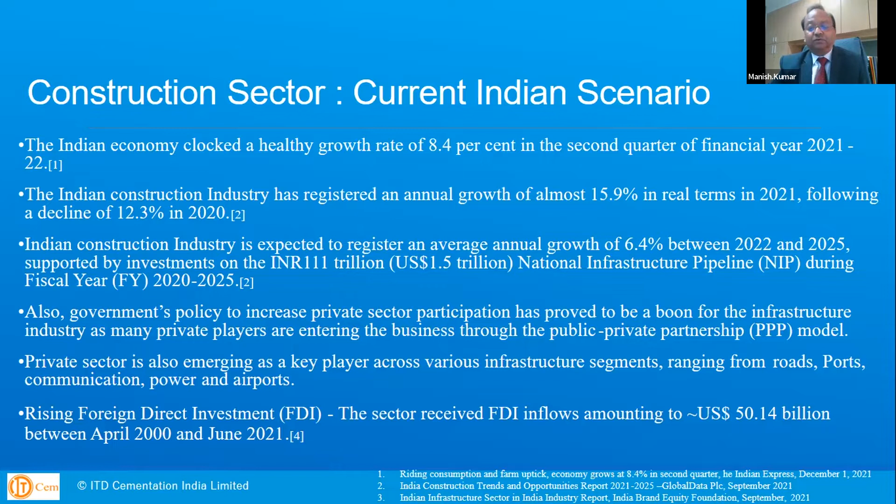Now, along with the very exciting times that we are all living in as far as the civil engineering fraternity is concerned, there are certain challenges. Let's look at that quickly.

If we talk about the financial challenges, then the cost of capital is very high, both in terms of the project cost and also the capital cost on the plant and equipment that one needs to purchase to execute these projects. So we are that kind of industry which is capital intensive.

And there are delayed returns on investment. Typically, the gestation period is very large on infrastructural projects, with a long-term payback period. Access to financing is very limited. Not everybody is able to get the financing done, especially the smaller contractors.

Low capacity of private players. Adverse cash flows on projects - many times we see that because of that, the contractor or the project faces challenges. So these are some of the typical financial challenges that one has to face working in India.

As far as the execution of projects is concerned, I believe that technology adoption can be done to expedite things, to improve the situation, but we are currently very slow at it. So this is a challenge that we all have to face and try to improve.

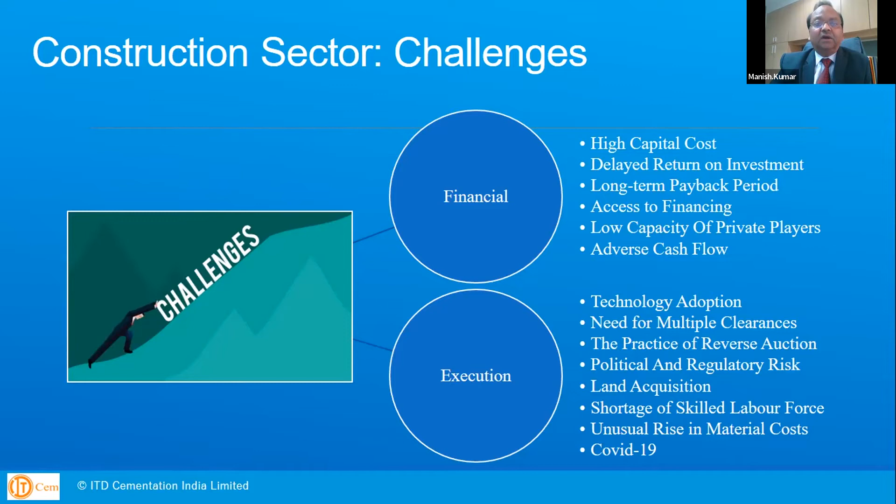Talking about challenges, there are also plenty of opportunities. Construction sector is critical for revival of the economy, and the government understands this. As it employs almost 49 million people, I'm sure the government focus is going to stay on this. Almost 12% of the nation's working population is employed by this sector.

India is expected to become the third largest construction market globally in 2022. Construction in all sectors contributes to about 60% of the total investment that takes place in India.

And we all know about the National Infrastructure Pipeline, which they had announced some time back, covering 6,500 infra projects totaling about 105 trillion rupees, which subsequently was enhanced to 7,400 projects.

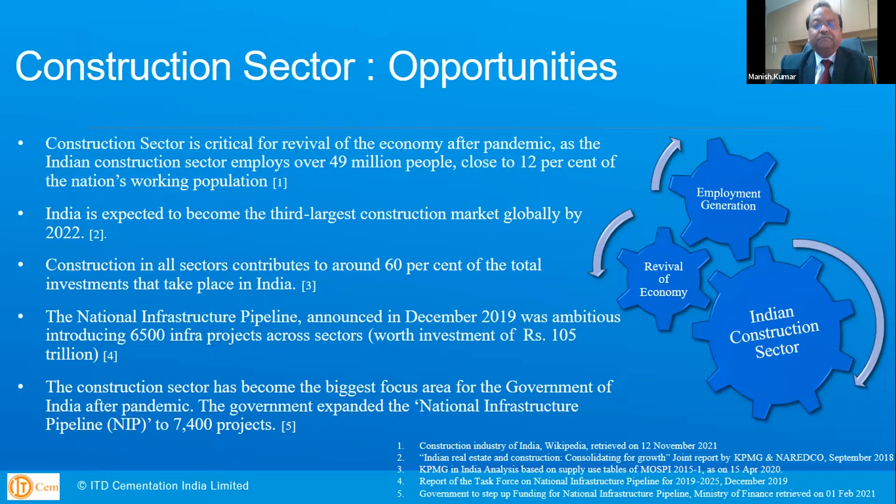Now, why new technologies? Since I'm going to talk about some of the emerging trends and new technologies, why are we talking about it? Why it is relevant is because of these reasons.

The project sizes have increased. Very large capital intensive infrastructure projects demand efficiency in terms of time and cost. There's a lot of money at stake, and time and cost are very important to make it viable.

Accelerated construction periods are demanded. We can't be selective now. Earlier, we used to select our sites based on the geology which is suitable, but now we don't have that choice.

So most challenging, geologically demanding sites, also we have to do the construction and find a solution. Overlapping of design and construction phases requires flexibility. Many times the design is still going on while the construction has started, and that requires flexibility in terms of construction methodologies.

Design optimization is done very efficiently. Very efficient designs are being used, which means there's less margin of error. Hence, whatever technology the contractor is using in the field, that has to be just right every single time, first time and every single time. There's no margin of error.

Deep excavations in the heart of mega cities, as we are building metros and underground metros, we are all facing this situation - 25-meter plus excavations right in the heart of the city through the center of the road. And we have to find the right solution to do that. Oftentimes, adopting new technologies gives a better solution to overcome these challenges. I strongly believe that in terms of quality, durability, safety, and cost, they are a better option many a times, and therefore we should be open to adopt them. The benefit in terms of saving construction time would facilitate completing more projects for the country.

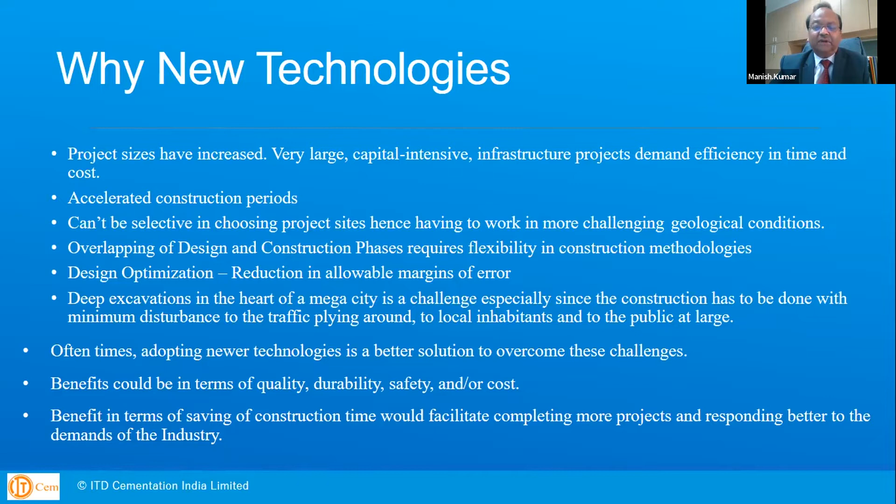Now, some of the recent technologies that I have personally used - let me start from the right side, which is compaction grouting. Traditionally, we have been doing permeation grouting in India, but this is compaction grouting, where a very thick mix of sand, cement, and admixture is made, almost 40, 45, 50 slump, and it is pumped into the ground at a very high pressure of almost 40 to 45 bars. Essentially, you are relying on this grout to push the soil out, densify it, compact it, and it does not have to necessarily travel through the soil. So it's a little different technique.

We utilized it for a site where we had to pass a TBM and a particular zone was rather soft, loose rather, and we had to densify it. We were able to do it and pass the TBM thereafter. So it's a technique not common in India, hardly used. This is one technique we can look at, even for preventing liquefaction in certain areas - it will be very effective.

Continuous flight auger piles - one trial we had conducted, it was a collective effort by the industry under the auspices of the Foundation Institute, and we were involved in taking the trial. Continuous flight auger is a very good solution, especially for industrial projects, because it is a smaller diameter and it's very quick - one pile we could do in about 35-40 minutes. So it's probably a very good solution in a number of cases, a number of projects.

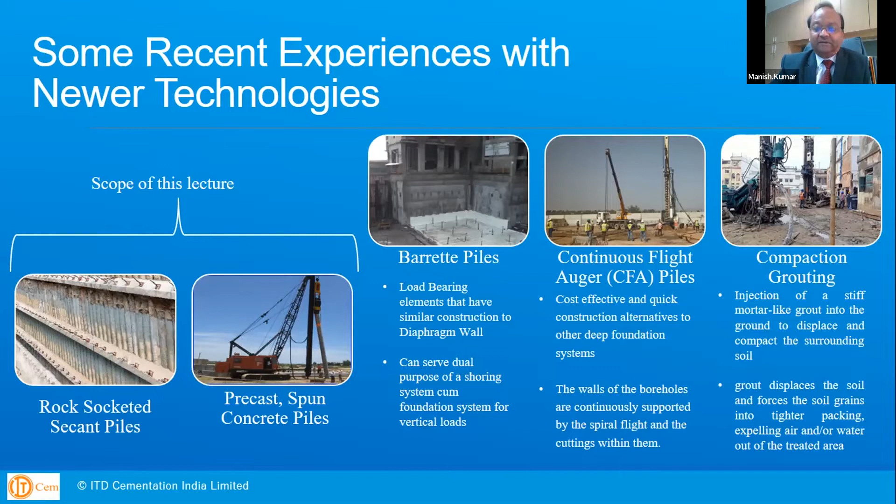Secant piles are basically a continuous strip of overlapping piles used to form a retaining wall. As you can see in the picture, we start with pile number 1, then 5, 9, and 13. In the next pass, we do the in-between piles 3, 7, and 11. In the third pass, we are actually cutting into the piles constructed earlier - these are called soft piles or primary piles, constructed with low strength concrete and no reinforcement, allowing an overlap. So in the third pass you do 2, 6, and so on, then come back and the remaining in-between piles get completed, giving you a complete wall. The piles which cut into the soft piles are called hard piles, and they have the reinforcement cage - hard piles are used to take the lateral pressure, earth pressure, and water pressure.

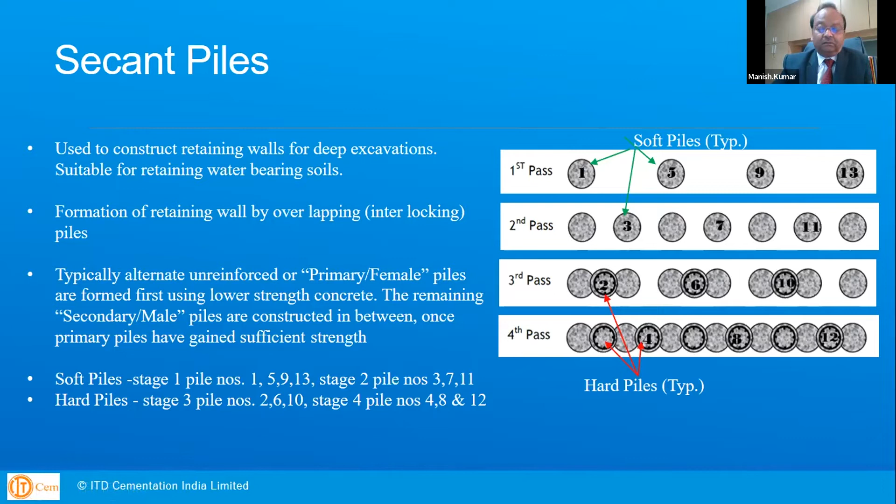As far as the advantages of rock-socketed secant piles, I'd like to mention they can be compared with diaphragm walls, which were typically used in the past in metro projects. Secant piles can be successfully installed in most difficult ground conditions, just like bored piles. There are certain advantages because you can get different types of tools, adjust the diameter, go with very large diameter, adjust reinforcement bunching. So all that flexibility available in bored cast-in-situ piles is also available for rock-socketed secant piles, done using the same technology as bored cast - these are bored cast-in-situ piles I'm talking about here.

This method is ideal for urban construction. Why am I saying ideal? Because of many reasons.

Most of the time, the area where we are working is very congested, with thick, very heavy traffic. When you do a diaphragm wall, you typically have to socket into the rock, which requires very heavy equipment and a larger space. The quantity of slurry required is significant, and almost 13-meter width is required to accommodate the rig, and cage making requires space. So you require a lot of space, which may not be available when working in an urban setting.

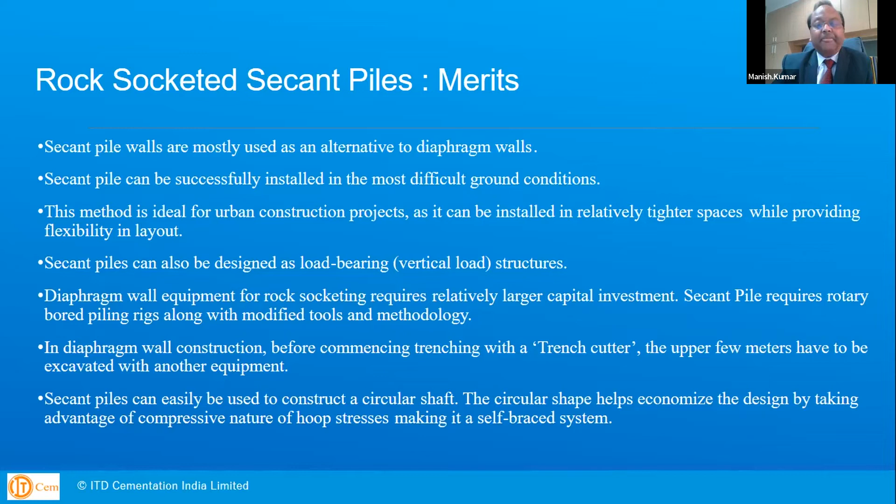Now, it does have some limitations also, which I would like to mention here. Secant piles produce more hard joints, and once you have hard joints, there is always a possibility that could be a weak joint that starts leaking. For better control, we need very good workmanship here—that I must emphasize.

A diaphragm wall has fewer hard joints, and therefore the potential for leakage or seepage is relatively less. Secant piles require heavier reinforcement compared to a diaphragm wall, just because of its shape—circular versus rectangular. So you can space out the reinforcement much better in a diaphragm wall. It's a more efficient cross section.

Secant piles require special tools which have to be developed and used. Secant piles are rock socketed, but if the rock strength increases and it is very hard rock, then there's a limitation because you won't be able to cut through the very hard rock. Essentially, you're relying on a core barrel only, so there's a limitation on the strength of rock you can penetrate.

Sequence of piling becomes important, therefore timing is very important in secant piles. You don't want the soft piles to keep gaining strength, and then when you have to cut it, it becomes very hard. Although you're using a low strength concrete, it will still gain strength with time. Therefore, the planning has to be very good.

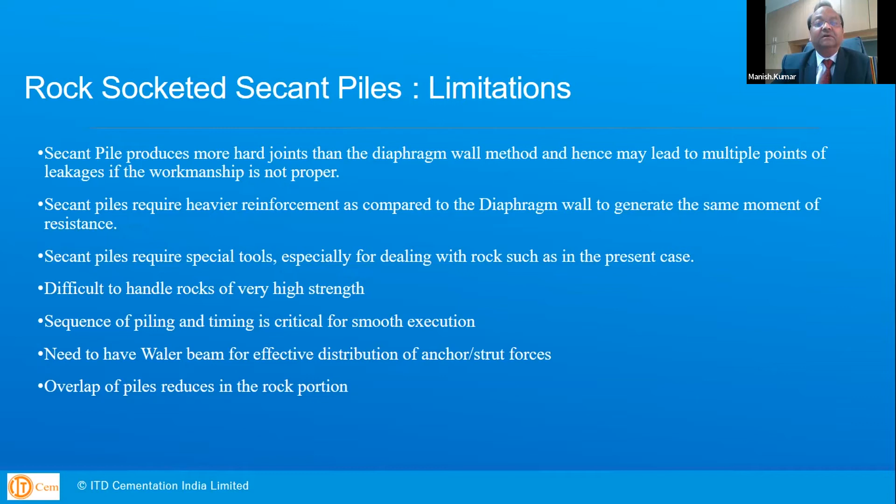In secant piles, we do need a waler beam, unlike in a diaphragm wall, where you can get away without it. And regarding overlap in piles—rock socketed piles have a reduced overlap in the rock portion, which I will explain a bit later.

So the project I'm going to talk about, case study 1, is the Mumbai Metro Rail Corporation Limited project. They have line 3 in the city of Mumbai, running from Colaba to SEEPZ, almost 33 kilometers, divided into 7 packages. We were working on one of the packages, UGC 4, which involves 3 stations—Siddhivinayak, Dadar, and Shitladevi—and about 10 kilometers of tunneling.

Initially, as our experience was, and as is true for almost all contractors in the country, diaphragm wall experience is available, so we were also thinking of using a diaphragm wall. But when we surveyed the site, we found the space was very limited and the traffic was very heavy, with VIP areas and some buildings very old—almost 100 years old, 70 to 100 years old—so we decided to go for secant piles.

Now imagine, we were not allowed to work in both shifts—only in extended shifts. If you have to do a diaphragm wall panel, the typical volume of concrete could be 100 to 125 cubic meters, and if that is not done in continuity, you will have to postpone it to the next day. That continuity has to be ensured, which is a challenge anybody can face working in single shifts. So we decided to go with secant piles, and the space requirement was much reduced.

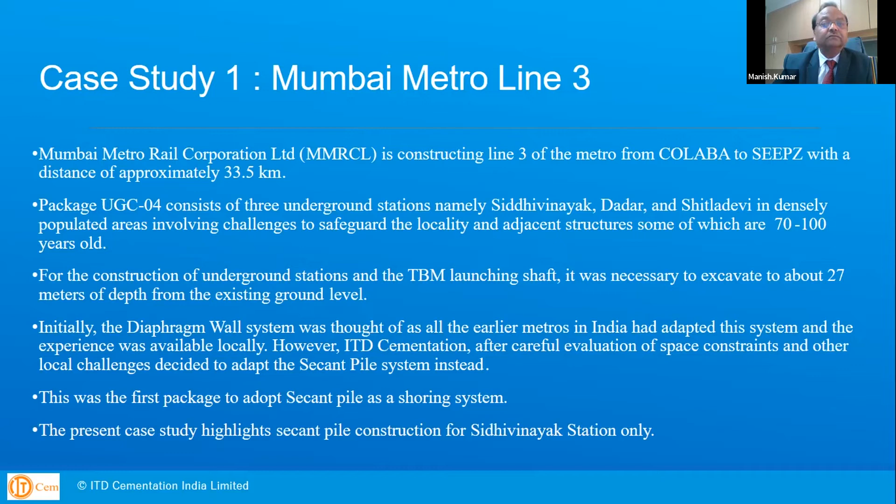So this is the layout. I'm going to talk about Siddhivinayak station, just one of the stations. This is the layout, 320 meters by 120 meters. This is the size, and it has got entry-exit points on different sides.

The typicality of this location was that we were right next to the Siddhivinayak temple, which is a very old and reputed, respected temple structure. We had to take care that whatever we do, we should not cause any damage or harm to the neighboring structures of the temple, as well as there were two roads adjacent to it.

There were some tall structures resting on piles. Some buildings were also on open footing, so we had to ensure that water flow into the excavation was almost next to zero. We didn't want to disturb the old structures in the nearby areas.

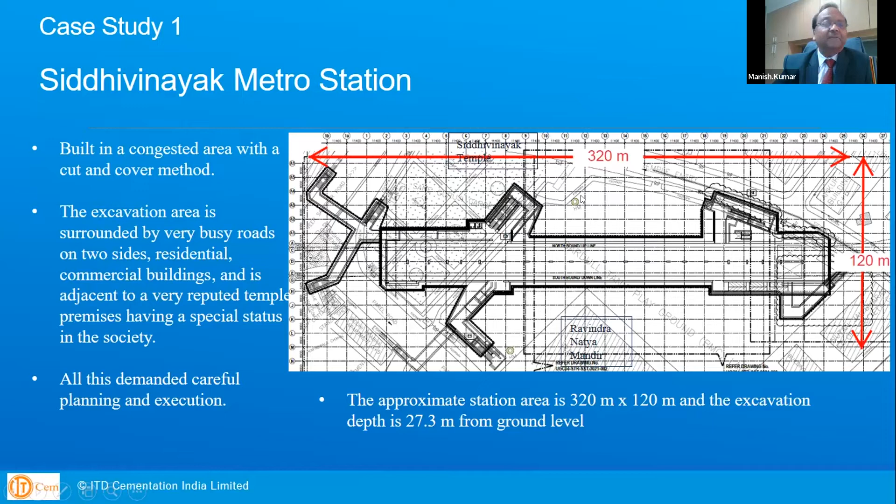As far as the site stratigraphy is concerned, overburden soils from 0 to 10.5 meters. Upper strata up to 4.5 meters was just heterogeneous fill, but after that we had gravelly clay extending to about 10.5 meters. Groundwater table was at 2 meters, so very shallow groundwater table conditions. We had to make sure that water flow into the excavation chances were bare minimum, meaning the secant piles had to be done with very good workmanship and quality.

Thereafter we had rock from 10.5 to the borehole termination depth of 35.5 meters, primarily breccia, volcanic breccia, and there were basalts and tuff also present. You can see in the table shown here, the rock was starting at grade 4, gradually grade 3, and then it was getting better with depth.

In this context, I'd like to tell you that we decided to terminate the secant piles at a depth of 18.5 meters. Of course this was to be checked in the field based on the samples we were getting. We finally terminated these piles at 18.5 meters, and at about 16 meters...

Excuse me, Mr. Kumar. Sorry? Excuse me, actually, time is up. So I would appreciate if you can complete within time. I'll certainly try to complete. Sorry to interrupt you. Thank you, no issue, sir.

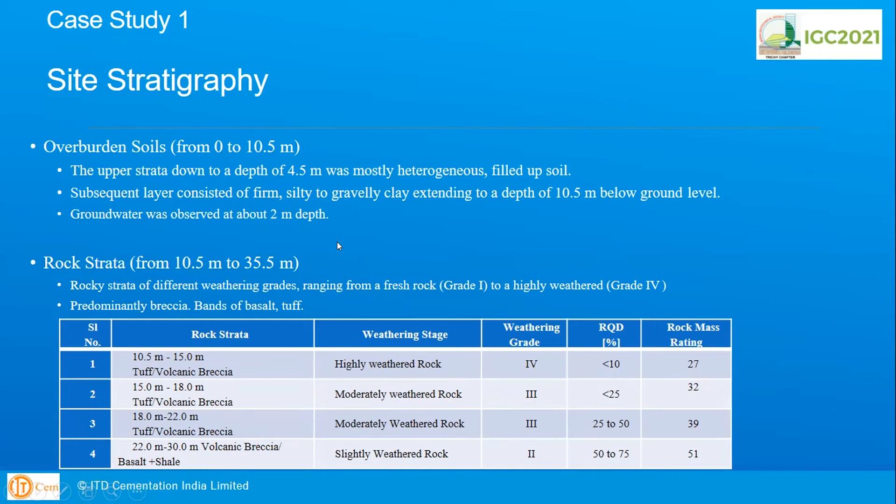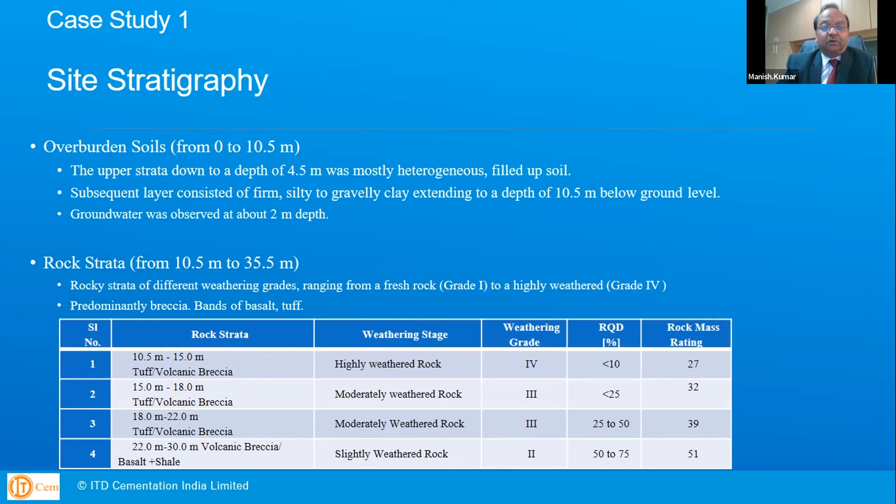So at 16 meters, we provided a ledge of about 1 meter, and thereafter we took a near vertical cut, actually 85 degrees. That is how the vertical cut was found to be stable in this type of rock. It was just shotcreted and rock bolting was adopted. This is the system that we followed.

This is the guide wall which we used. I must emphasize that a guide wall should be used when you're using secant piles, because verticality becomes very important. There were 765 soft piles and 765 hard piles. The center to center spacing was 1410, the diameter of the pile is 880, and 175 millimeter was the overlap between the soft and the hard pile.

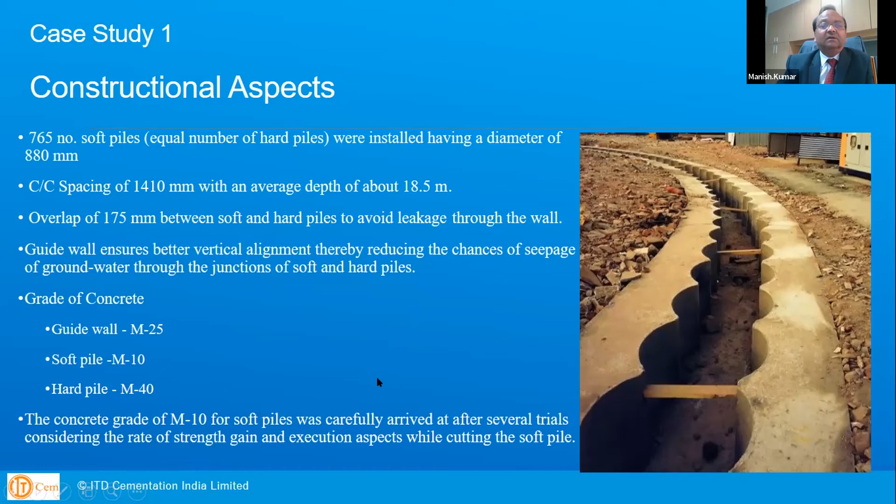The grades of concrete: guide wall M25, soft pile M10, hard pile was M40. And that is how the whole secant pile wall was constructed.

Since we are running short of time, I'm only going to mention some important points. The cycle time was very important: soft pile took approximately 12 hours to complete one pile, hard pile almost 16 hours. This was important because we were working in extended shifts, so we wanted to make sure we get one pile in one shift and don't have to continue it the next day. This became possible with the development and refining of the tool that we developed. I'll show you the pictures of that.

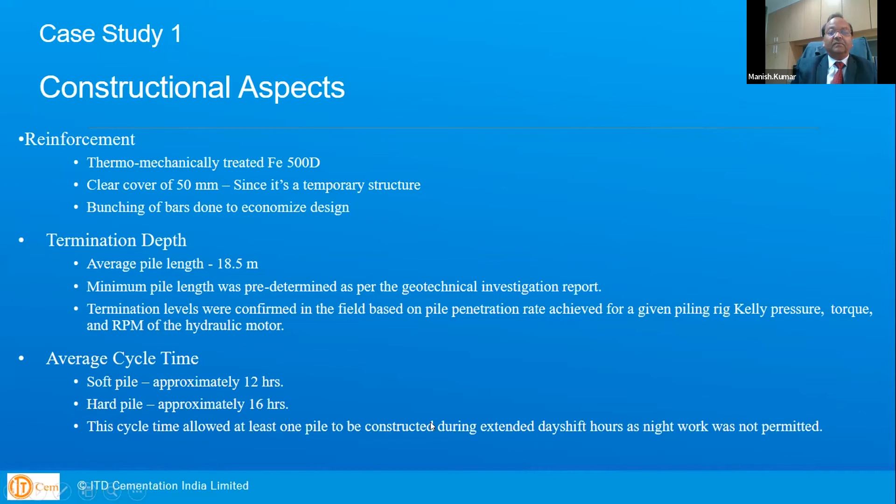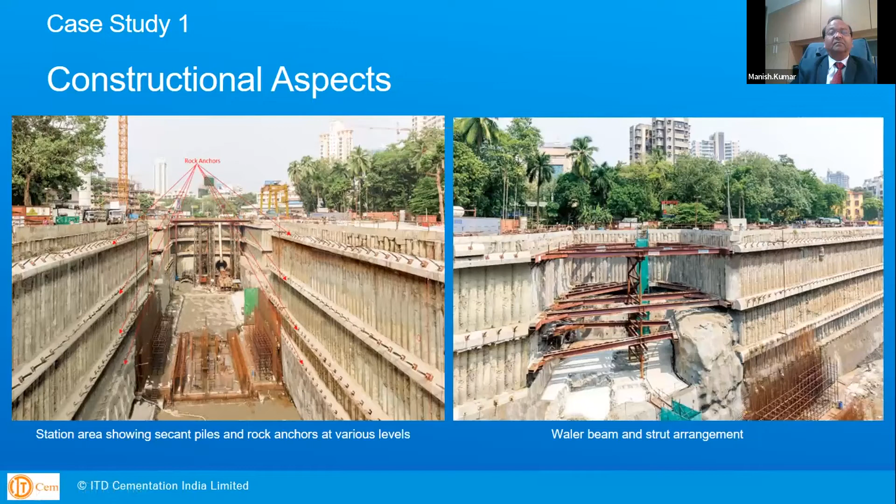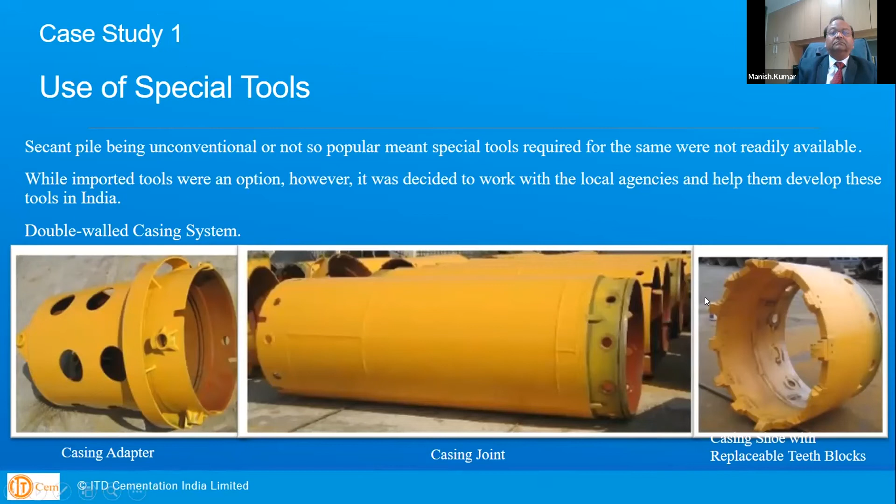These are some of the teeth, used in the rock portion where the core barrel is, just like any other penetration into rock with a core barrel. Nothing special, but this is the one we had at the bottom of the double-walled casing which we developed, and this was cutting into the soft pile and also in the soil portion. So the casing was doing all the cutting till the top of rock, and when we entered the rock we used a core barrel.

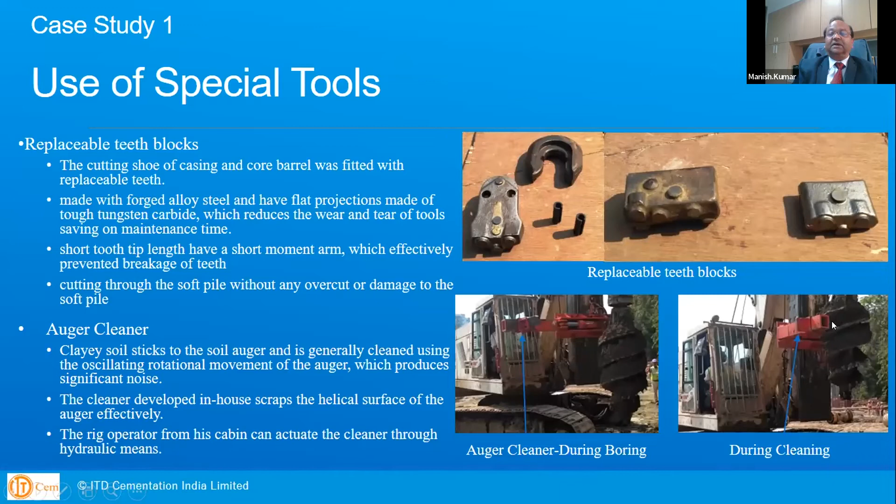Since noise was also an important issue, we used this hydraulic arm which we developed. It just touches this, it can be moved out and in. Once it comes inside, the soil can be cleaned very easily without any noise.

Now let me also cover spun concrete piles, which is a different technology altogether. These are precast piles, hollow piles, and typically the diameter is up to 800 millimeters.

These piles are constructed or fabricated in factory settings, so the quality of the pile is excellent. They can be transported; it is typically cast in 12-meter lengths for transportation purposes. Once it goes to the site in pieces, they can be driven into the ground, so this is a driven type of pile.

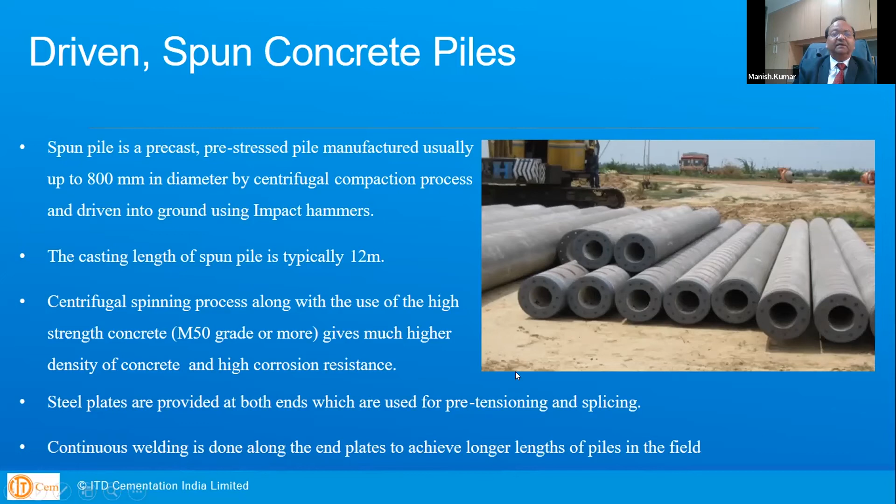Manufacturing process is cage preparation. Typically 7-millimeter HT wires are used. There is almost a 50% saving in terms of material, both concrete and steel, if I compare this with the bored cast-in-situ pile. So in today's scenario, I think it's a very important saving.

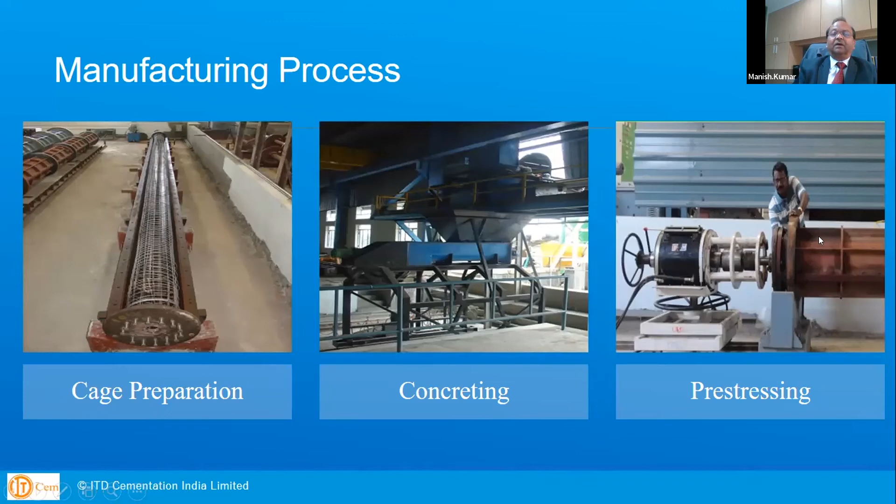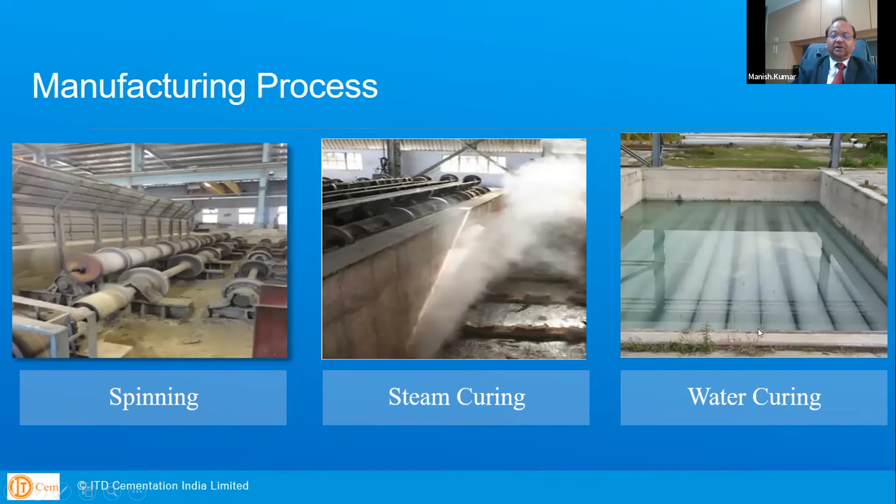Here are some pictures from the factory setting, and pre-stressing is going on. Once you put the concrete in, it is rotated at a very high RPM of 1500 to 1600, which densifies the concrete, and you get very high grade concrete of about M50, M60, M70, M80. Spinning is going on here. Then steam curing for about 8 hours to gain sufficient strength so it can be carried out, and water curing if required. So that is how the piles are made.

I've already told you the saving of almost 50% in terms of material. Much higher density, durability is ensured, and it's highly corrosion resistant. So it's a very clean operation in the field.

But we should also be aware that transportation costs at times can be very high, while it is fabricated in India, made in India, but there are very few places where it is made, so transportation can be high. Wastages are more in variable ground conditions, because the parts sticking out of the ground have to be broken and wasted. It's not conducive for bouldery and rocky strata. And pile capacity is limited by the limitation of the diameter. In India, at least, it is 800. Of course, overseas, it is much larger.

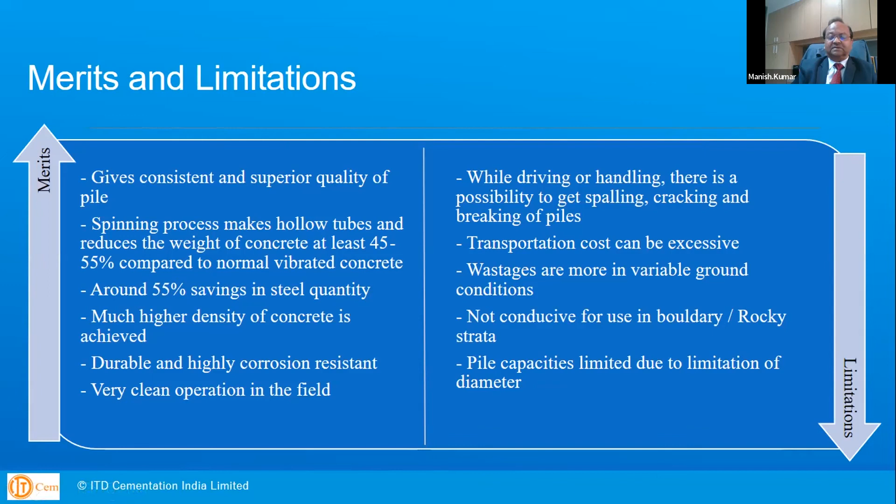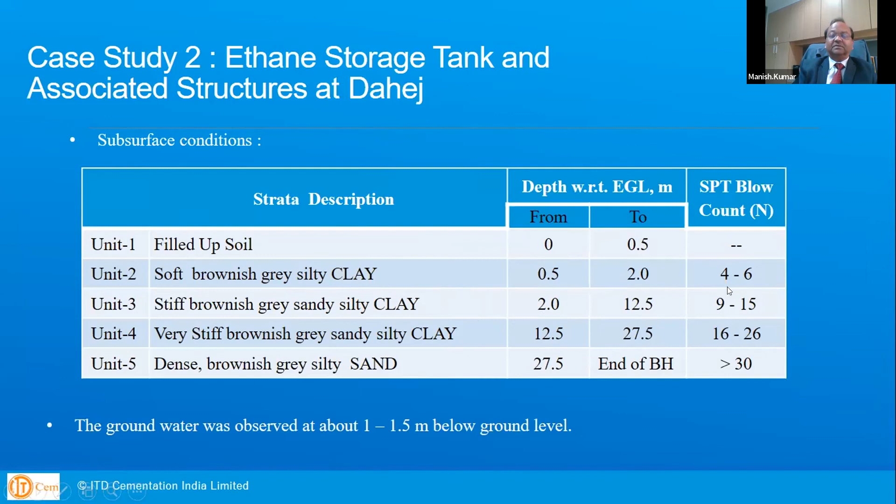1684 numbers of 600 millimeter diameter spun concrete piles, and we used a 9-ton hydraulic hammer. A hydraulic hammer is much better in terms of ensuring the piles don't crack. This is a better option than diesel or pneumatic hammers.

And we had 600 millimeter diameter piles. On average, installation time for each pile was about 3 hours only. So here you can see the advantage that you have. With 5 rigs, we were able to drive 25 to 30 piles.

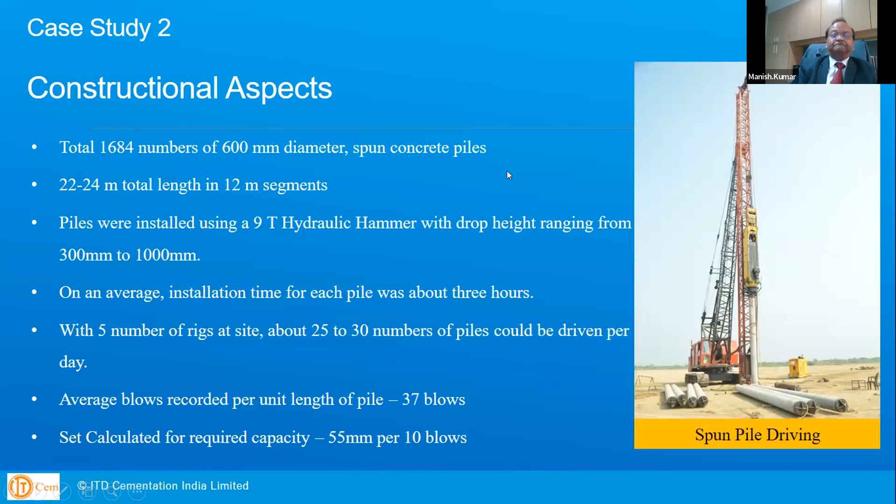The set criteria used was 55 millimeters for 10 blows, and the average blows recorded was about 37 blows per meter. In the field, you can weld 2 pieces just like this. It has end plates, steel plates, so those can be welded, and the pile can be continued longer than 1 piece, which is what we did.

We reduced the second piece to 10 meters because we found they were sticking out of the ground. So 24 meters was a little high, and we reduced it to 22. The compression load tests showed the test load was 252 tons for the 600 millimeter diameter pile, and it showed 6.6 and 8 millimeters as the maximum deflection settlement.

The project was completed in 7 months, which was 1 month ahead of schedule. The reason spun concrete piles were chosen was because they had an advantage in terms of time compared to bored cast-in-situ piling. So you can see that this can also be done very quickly.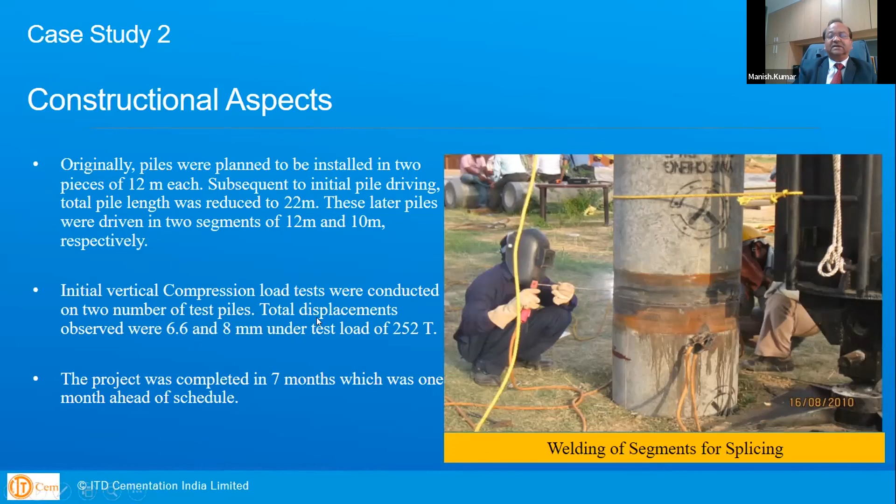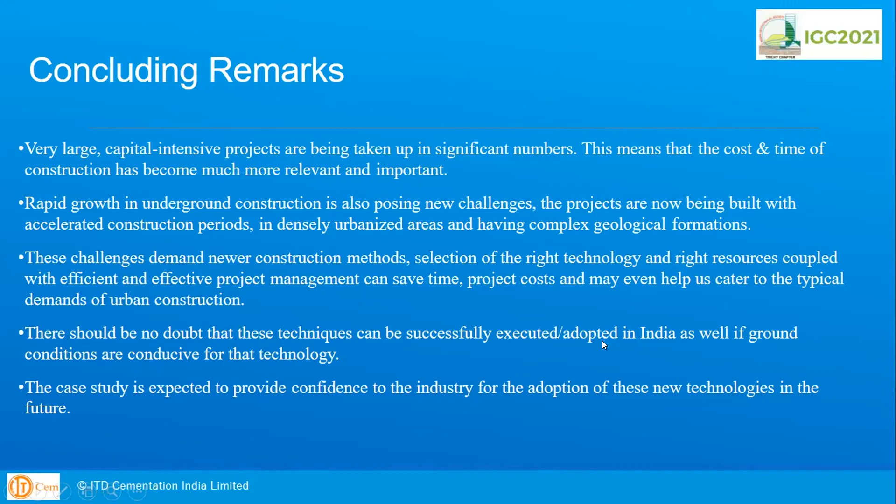Therefore, we must explore different possibilities, different technologies, and use the best one available to us. These challenges demand newer construction methods and selection of the right one. I think there should be no doubt that these two techniques I have talked about in this presentation can be successfully executed or adopted in India, as well as if ground conditions are conducive for that technology. The case study is expected to provide confidence to the industry for the adoption of these new technologies in the future.